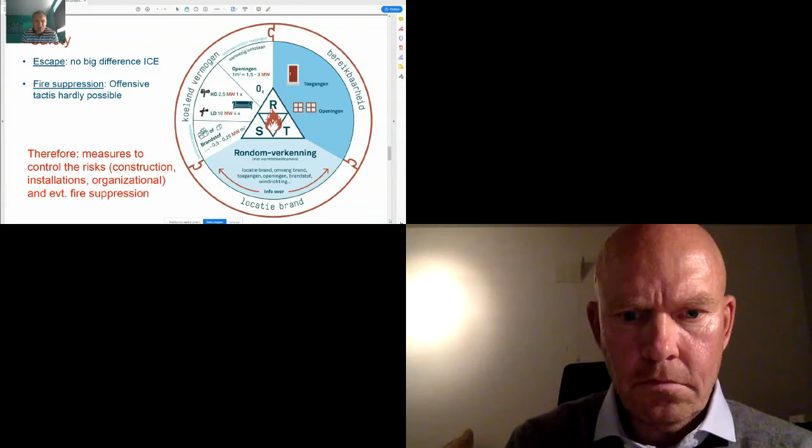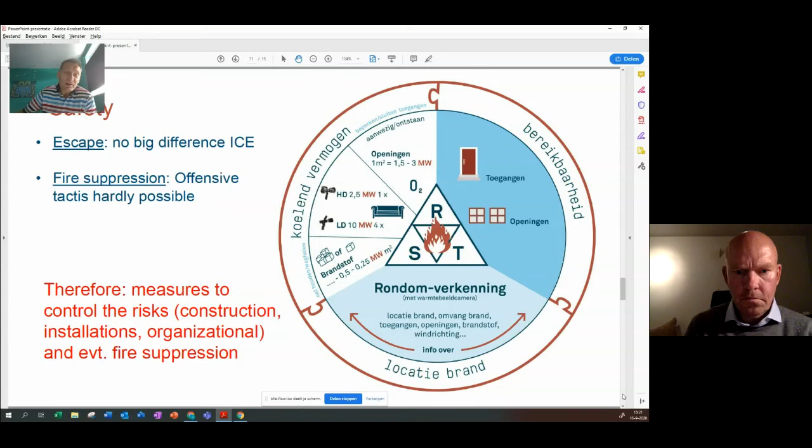And therefore, we thought of what kind of measures to control the risk we could think of to deal with those risks. And we looked at measures dealing with the construction, installations, some organizational methods, and in the end also measures that could facilitate the fire suppression. And I will not touch upon all the measures that we formulated in our report, which is downloadable from our site.

It is in Dutch, so that might be a problem for people who are not able to understand Dutch, but maybe Google Translate will help. There is a management summary in English.

The fire safety measures had all kinds of variety. For example, for the construction, we looked at cladding, local. For example, at those places where electric vehicles are parked or charged, what we could do is to make the construction heavier, so they can resist higher temperatures for a longer period. Or, for example, you could think of developing a tub where the car could be, let's say, drowned. So there's a lot of water to cool the fire in the battery pack.

From an installation point of view, we thought of sprinkler and water mist systems, but also emergency shutdown buttons, collision protection of the charging points, and also terms of use for people parking in the garage. For example, when you have had a small collision but you don't see any damage, there could still be a sort of hidden damage in the battery pack. So we could touch upon ways to behave as an electric car driver, when to park your car, or when to go to a garage for maintenance instead of parking your car below houses or something like that.

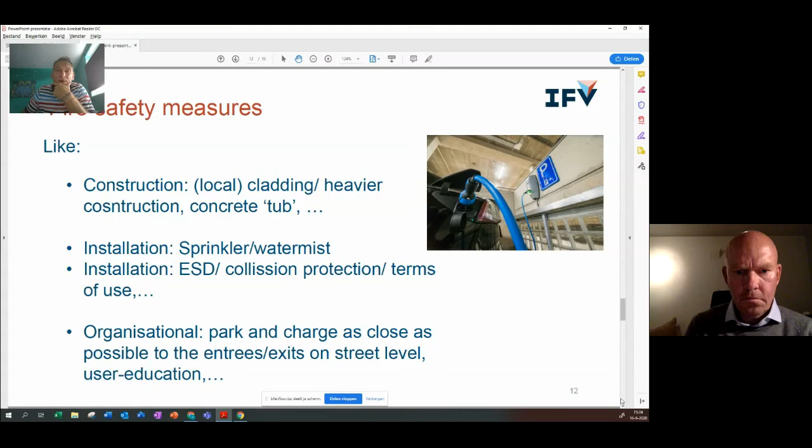And finally, we have some measures from an organizational point of view. First of all, we think right at this moment it's wise to park and charge your cars as close as possible to the entries and exits on street level, because then it facilitates the firefighters and the guys from the road authorities to pull the car out of the garage or to suppress the fire, but also to educate the car users how to deal, how to maintain and how to behave in a safe way when you have your electric car and park it in garages.

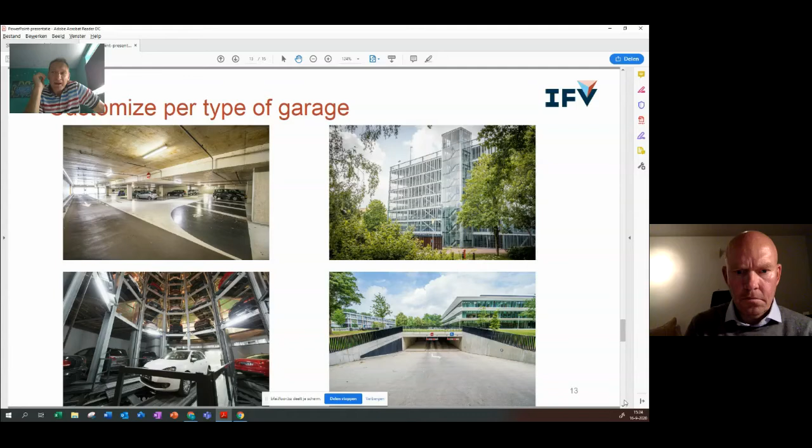And then the next step in our report is: are all these kinds of measures available and proportional for all types of garage? No, they aren't, but at this moment we are not able to specify which type of measures should be applied in which type of garage. But there is a big variety of garages. I put some pictures over here. And what we suggest is that when you intend to have charging points and electric cars in your garage, which was not originally foreseen in the building and construction of the garage, get in contact with fire safety advisors and think of what kind of measures would facilitate fire safety.

The safety measures that we formulated are not a sort of long list that you have to realize in practice. So there's no accumulation of all these safety measures. We think: try to get the conversation going on what kind of safety measures should work in this typical garage that is the object you talk about. And finally, it's no one size fits all. It's really customization of your safety measures regarding your type of garage and the usage of your garage.

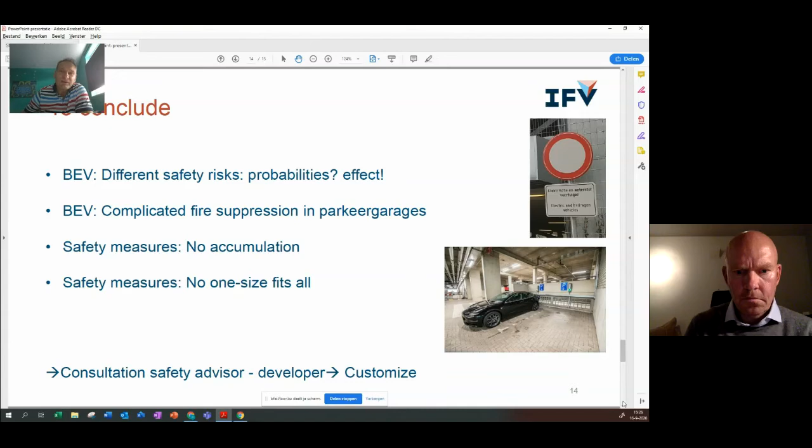And in the end, we also tried to look at the probabilities. We don't have a very good view on the probabilities of the accident causes. What we see is that there are some typical effects that go along with battery electric vehicles, and that's the way firefighters look at this issue. They have a harsh environment, a confined space, a parking garage, where fire suppression is complicated, nasty, and therefore we suggest some safety measures to customize your garage to deal with those typical safety issues regarding battery electric vehicles.

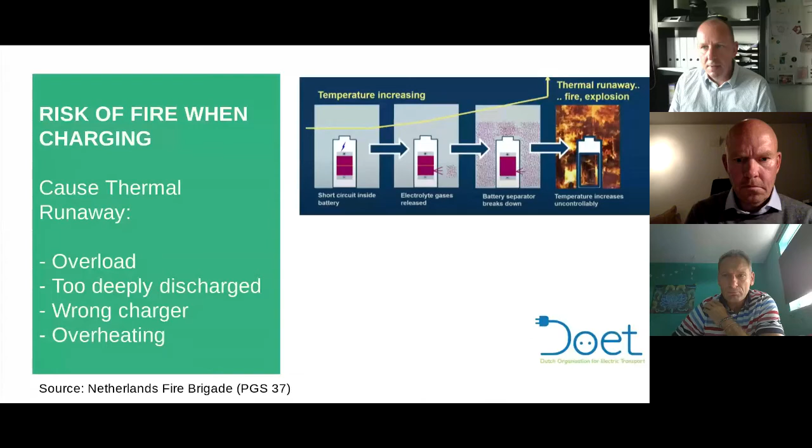I want to say a little bit about the risks of fire when charging, because the fire brigades in Holland stated that overload, deep discharge, wrong charging, wrong use of chargers, and overheating could cause this thermal runaway already mentioned by Nils. And this is a problem in the sense that this is the case for normal lithium-ion batteries, but not especially for electric cars. We can charge lithium-ion batteries in many ways, and we have some modes to relate to the different possibilities.

Mode 1 is what we all do with our telephones and laptops. Mode 2 is a little bit more controlled, by the so-called granny chargers. They have a box in between the cable and both plugs, which can turn off the charging session when something is wrong in the car. But it doesn't help when something is wrong in the infrastructure from socket to grid connection, for instance.

And then we know mode 3, and this charging mode is controlling the same as in mode 2, but because of the infrastructure which has to be newly installed for mode 3, it's a lot more safe, because then we have regulations which have to be met to install this. And then we have mode 4, which is more or less the same in the sense of communication between the battery and the charging station, and it's then in the DC field.

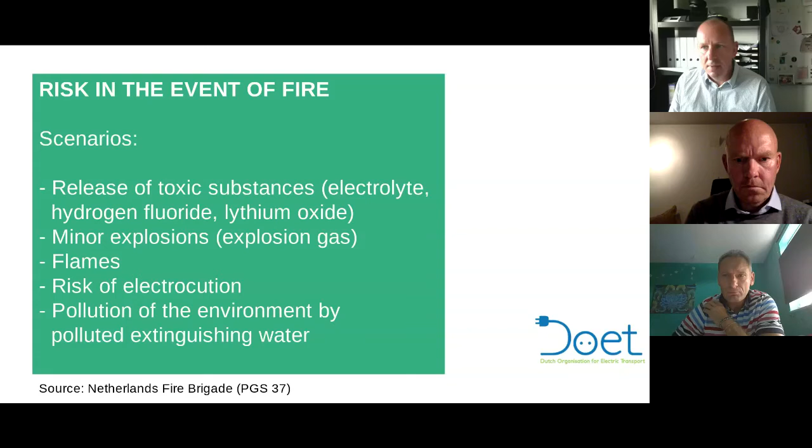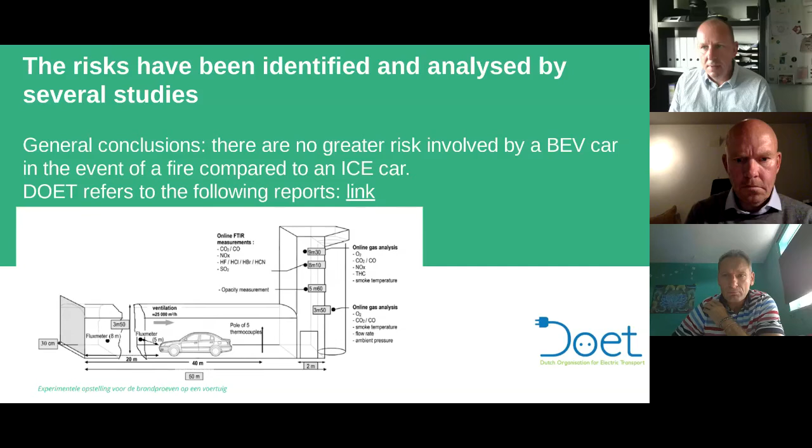We have a pollution risk of the water which is necessary to put out the fire, and so on. And several studies have been done. We listed all these studies, and you can use the link in the presentation, which you can download afterwards, to all these studies. And most of the studies are used by Nils as well for their vision on this issue. I already mentioned that fire suppression is difficult. Nils has mentioned that as well.

And actually, one of the main questions I have for Nils is, what does a fire brigade do when there is a fire in a parking place like in Alkmaar last month or in Oslo last year? Because in my opinion, the fire brigades control the fire, but wait until all products which are able to feed the fire with energy are used up. So in that sense, it shouldn't be much of a difference.

Nils already mentioned that 8 megawatts was the number of the fire heat release available in a car, and that there isn't much difference between a conventional car and a BEV. But we made some calculations as well on how much energy is available in a car, and we see not much of a difference there as well. So that's still a question, and we hope with the findings from Nils from the fire in Alkmaar, which was recently, so there is no further information available yet, we hope to learn a lot from this research.

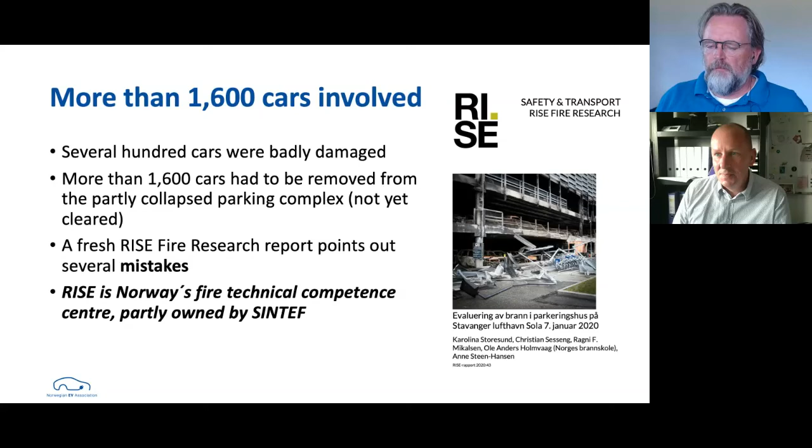So how many BEVs are in Norway and in the county where this fire occurred? As you may know, more than 50% of all new cars sold in Norway are BEVs. And of the total fleet, a little more than 1 out of 10 on the roads, and a little bit more in Rogaland County. So that means an equivalent BEV share might have been in this parking garage at the time of the fire, even though the number is still not confirmed.

As it turned out, the witness claims to the police were wrong. The fire starter was in fact a 15-year-old Opel Zafira with an internal combustion engine. And it caught fire when a family returned home from a trip abroad, and they were about to travel to their home, and this whole thing started. And even though the diesel car was to blame, the public damage was to a large extent done, meaning we had to go to work.

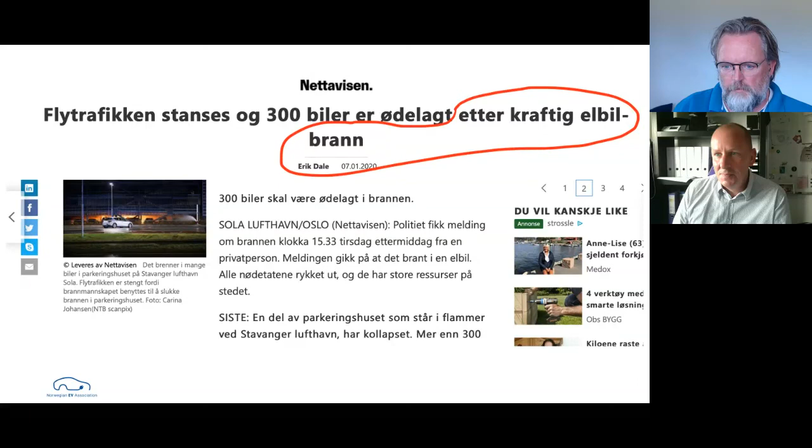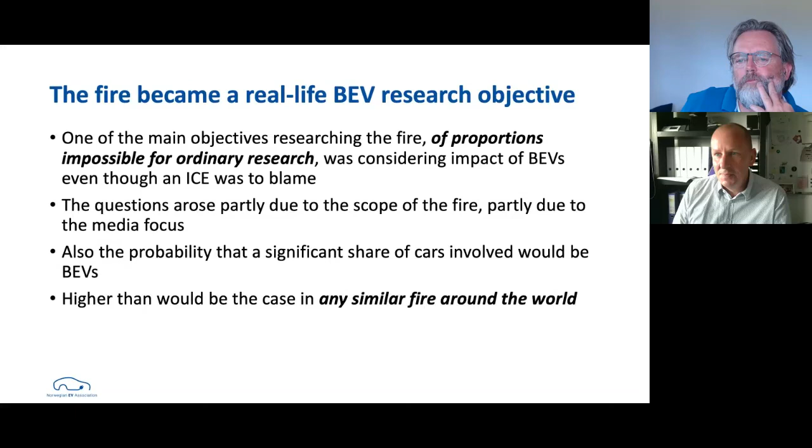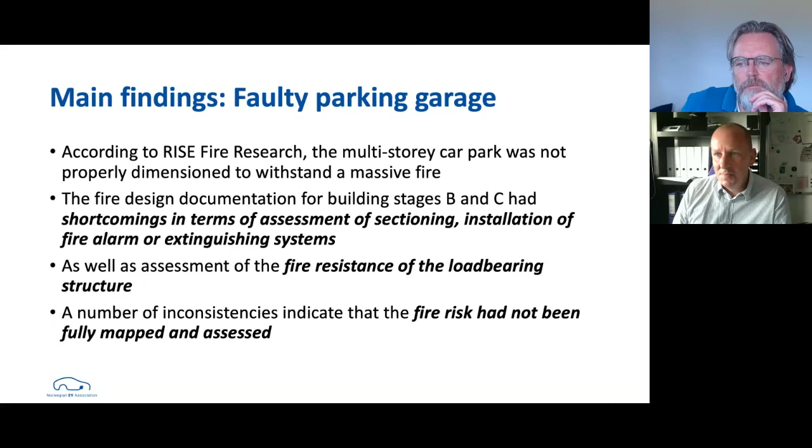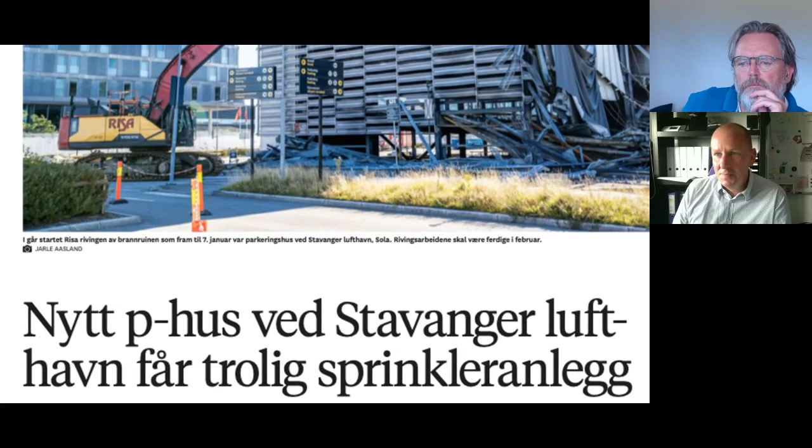So dedicated extinguishing systems like sprinkler and water mist, like mentioned earlier during this webinar, would probably have reduced the potential for fire spreading to other cars, and also made it easier for fire and rescue crew to strike the fire down before it became so big. And you had a similar case also in Liverpool, UK, back in 2017, where a similar amount of cars were inside. So, as this story turns out, when the new parking garage is built in the Stavanger airport, it is going to get sprinkler, because the old one didn't have.

And also, the research shows there is no significant difference in fire intensity or duration, regardless of different involved drivetrains. And also no thermal runaway seems to have occurred in any of the parked BEVs. And also we don't know for sure at the moment if any of the battery packs were totally damaged by the fire. But it seems, or is undisputed, that the contribution was limited or none.

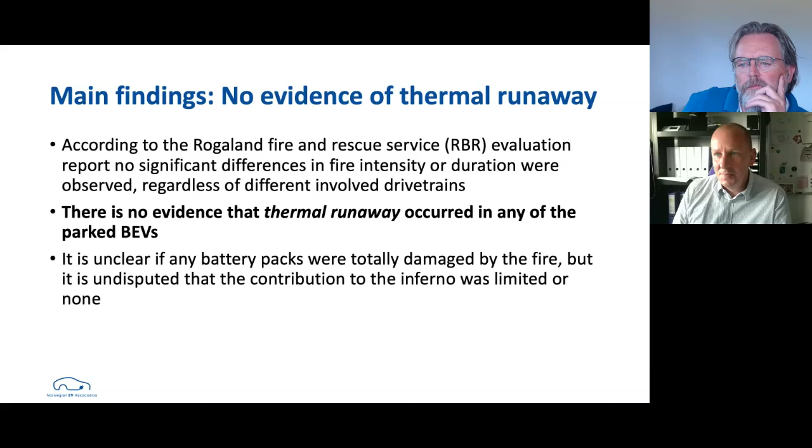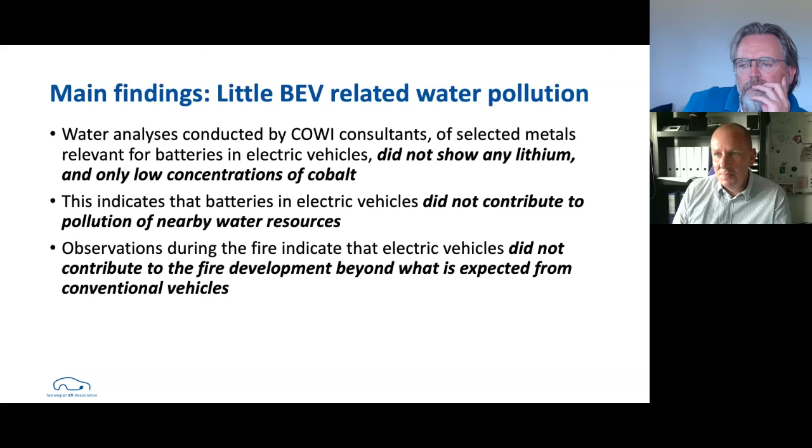And also adding to this is that when water analyses were conducted afterwards for selected metals that are in batteries, they didn't show any lithium and only low concentrations of cobalt. So this means that the water used for extinguishing the fire didn't contain any of this, or almost none of this. And this leads to the conclusion that the BEVs did not contribute to the fire development beyond what is expected from conventional vehicles. And I think that's an interesting finding, because people believe a lot of things, but getting some new knowledge doesn't hurt.

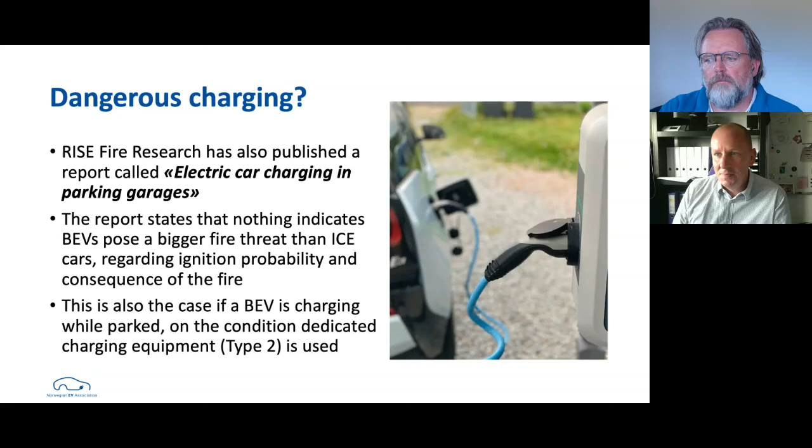I'm not going to dig too much into the charging, as charging was not a very important subject concerning this garage. Not a lot of charging points, and probably a lot of the BEVs parked in the garage were not plugged or just standing parked just like any car. But as I mentioned from experience in Norway, fire statistics indicate that when using proper charging equipment, mode 3 type 2, there's a very small probability for fire or also ignition or consequence of the fire. So we recommend as an association that our members use mode 3 type 2 charging equipment for sleeping well at night and feeling reassured that car charging is safe.

And also, during my rundown of this research, there are quite a few paradoxes in this matter. Just like RISE Fire Research summarizes, and I quote, "The difference between the impression of BEV involvement in the fire from the media and the local fire and rescue service observations is in itself an interesting result from the incident." I think that's something to think about, because a lot of opinions, a lot of different messages spread through social media, and well, I think we can say we had quite a fire in social media as well in the days following.

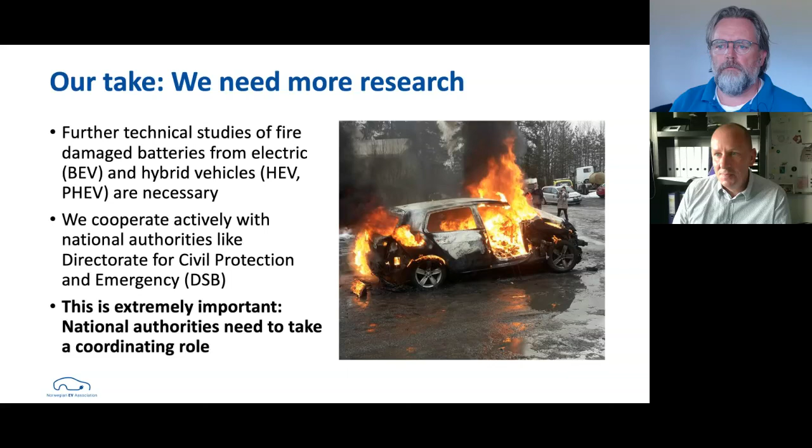So, running towards the end of my presentation, we feel that further technical studies of fire damaged batteries from both BEVs, HEVs, PHEVs are necessary. And we also, as an association, cooperate actively with national authorities like the Directorate for Civil Protection and Emergency, in short DSB. We think it's extremely important that national authorities take this coordinating role, making sure we can counter misconceptions with facts and learning.

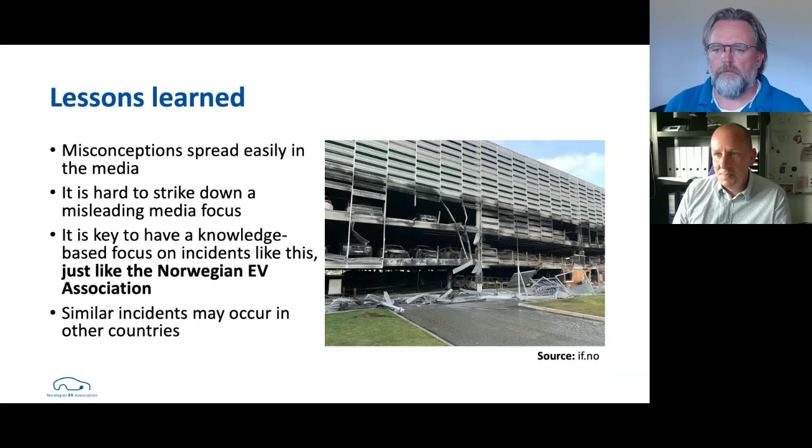So, getting to the lessons learned from this actual happening. The misconceptions, they are quite hard to strike down. They spread so much easier in the media than you actually get to kill them off. And we are absolutely sure that it's key to have a knowledge-based focus on incidents like this. Because even though we don't know it for sure, it's probable that similar incidents will happen in other countries, in other cities later on. So the more knowledge we have and the more shared information we have, the better it is. So this leads to the conclusion that any best practice experienced in this area should be shared and made available to the public in order to increase common knowledge.

I've also experienced during my years following this subject that the different fire brigades and fire officers have a different knowledge and different attitude towards the relative fire risk of BEVs. Some are brilliant, while others are more into prejudice. But even so, we feel from the experience in the aftermath of this fire that it actually may have helped to change consensus concerning the BEV fire probability.

A very unfortunate happening, but luckily no lives were lost, no people were hurt, and it's only a matter of economical losses and of course a lot of smoke. So this rounds off my presentation. If you have any questions regarding the Norwegian situation, please come forward.

Thank you, Ståle. Really interesting. Really appreciate your contribution on this. I think there's a lot of lessons learned on this topic. So I did get a very simple question on this matter from the audience. So an increased risk of fire in battery electric vehicles is actually fake news?